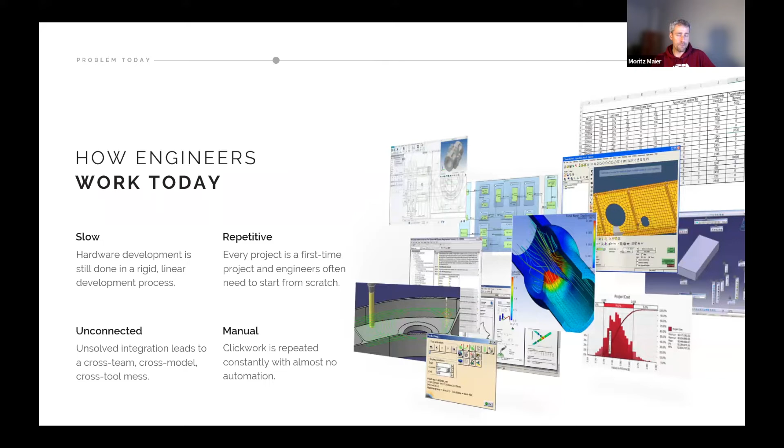The interesting thing is that once a project is finished and there's maybe a change in the design, or you need to develop another part which hasn't been developed before, engineers typically start from scratch. So they go back in the CAD world, do a whole redesign, then do back the meshing because the mesh properties are lost and stuff. So it goes on and on and on. And this is a huge problem at the moment in the engineering world in general.

So we see that we have this status quo of doing engineering, but we also see that we need to be faster in time to market. As you see, for example, with our climate crisis which is coming up, people need to reinvent sustainable cars or electromobility, and they need to do this fast. So the time of actually being able to explore different variations to see which is the best solution, and to drive this development process really fast to a final product, this is crucial.

And at the same time, we have this huge problem, or at least the demand, that we need to increase the complexity as well. So we need to think about recycling, we need to think about CO2 footprint, we need to think about multi-material designs, all the complexity that comes into those systems, at the same time being fast in development. Those two drivers really crash if we're using these old processes, methods, and tools of development.

And there are also some side effects that our customers are telling us, which are, I guess, good for you as young engineers, but also for the companies it's really a challenge at the moment: those very experienced engineers, if they get retired, basically the knowledge is lost with them. So the experts, if they leave the company, they're just taking the knowledge with them, and it's not available for the company anymore.

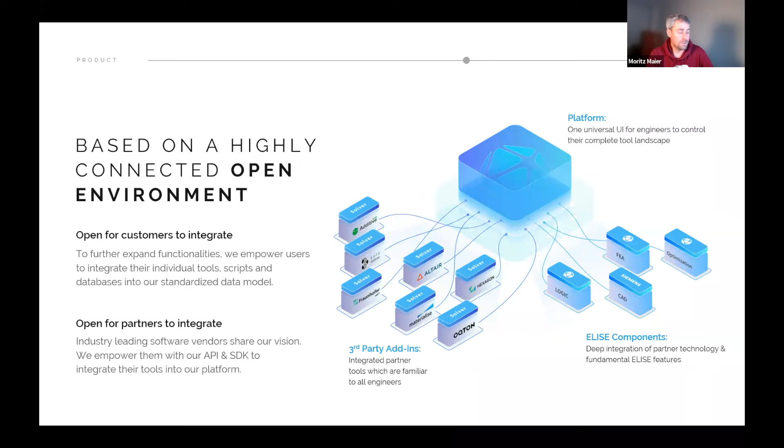So for example, from Altair's Hypermesh solution, or from Hexagon's generative design solutions. This setup is really smart, as you are able to connect basically everything you want. And if you are ready to program, you can also integrate your Python code and stuff. So it gives a nice development framework to play around with, and also the ecosystem we're providing - you'll have the chance to test it out later. It already connects a couple of different software vendor tools, and you're free to select and plug them into your workflow like you want.

So this was like a first stretch, some theoretical background information. Are there questions already here that I could answer before we jump into the software itself?

I guess not, Moritz. No questions. Okay, we're all a little bit shy. We're engineers, Moritz. You can also write the questions in the chat if you do not want to raise your voice.

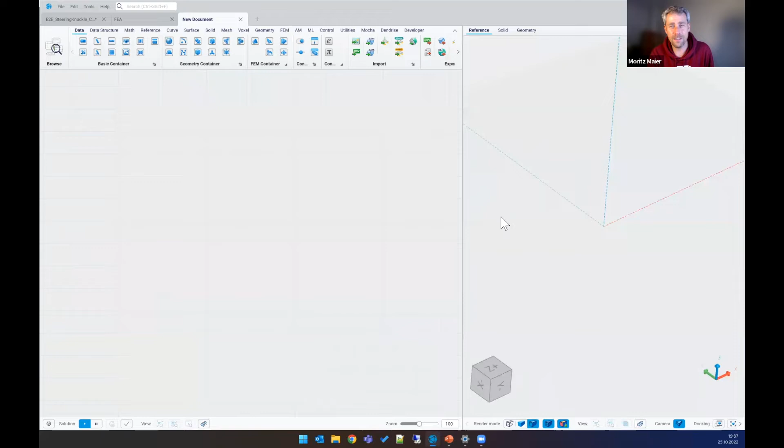But then let's just have a look into the software. I guess then maybe the one or the other question might arise. So as you can see - can you see the software, the two gray screens? Yeah, works, perfect. So this is the software, this is ELISE. And I want to give you a short introduction to it and guide you through, show you one or two examples before I then go back into the PowerPoint world to show you what our customers did with it.

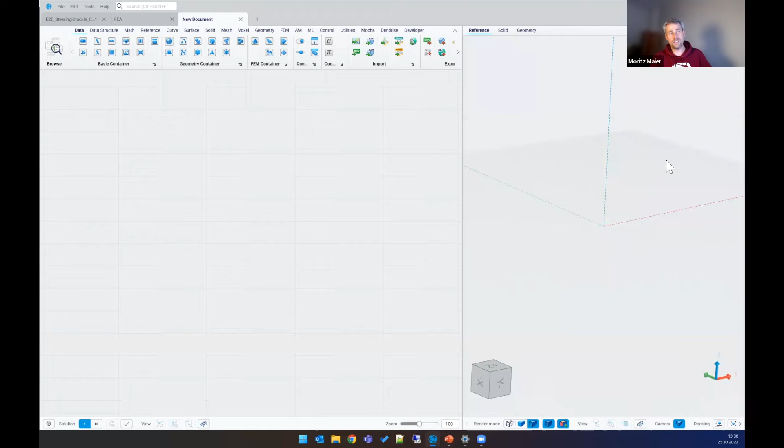But you can see that it's basically divided into these two areas. We have on the right side our CAD environment, where we will see the geometry in a second. So this is something like you can think about having an output, for example, for a CAD model for the algorithms, and also the interaction with the geometry world. And on the left side, we call it our virtual canvas, where we are able to do visual programming. And I want to start with a very simple example, just by taking two variables, maybe a 6 and a 7 in here.

And I would like to connect those two to a node which does multiplication for us. And if I give you the answer to all of the questions, 42 here, it's just the multiplication of those two numbers. So this is the basic principle of how the software works. Information is always flying from left over those wires to the right, and we have those components which are doing something - in this case, a very simple mathematical multiplication.

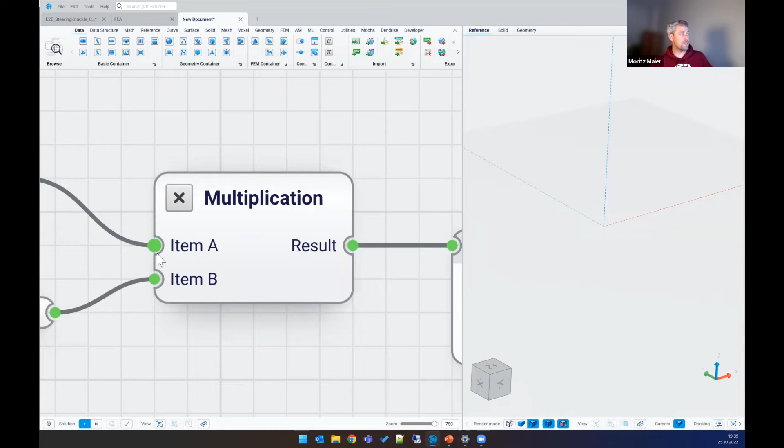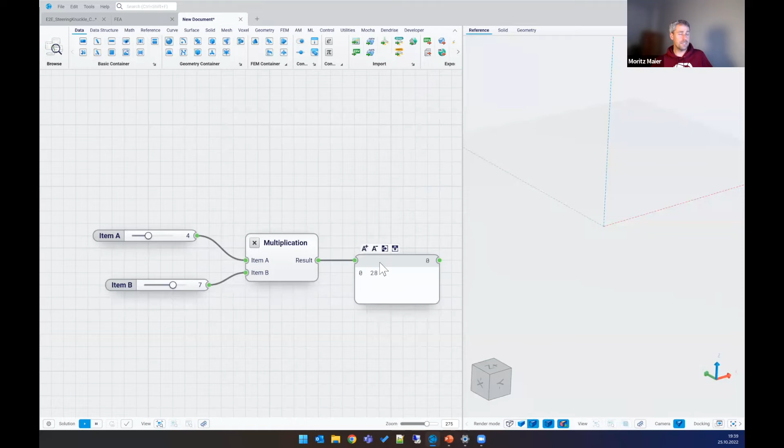We have inputs on the left and outputs on the right, and over those wires or cables, there could be any information flying. In this case, it's super simple - it's an integer value, a number, 6 and 7. And now if I change the parameters, maybe to 4, you can see that also the downstream results are updated instantly. So in this case, it's 4 times 7 is 28. Or if I change this in the background, it's 24, 4 times 6. I guess you get the idea of how the system works.

And the interesting thing is that we can now use this principle of visual programming for lots of different tasks. So this was maybe a hop into the world of, let's say, math. You can see that we have lots of logic operators in here - for example, if this is larger than that, or gates, or modulus, or divisions, or here's our multiplication component. But we also can do all the MATLAB style field-driven designs, tensors - everything that you would need to come up with logic or mathematical expressions could be programmed in here.

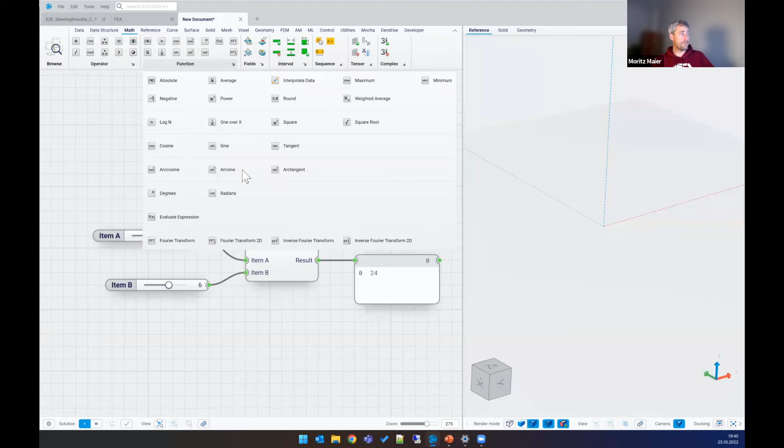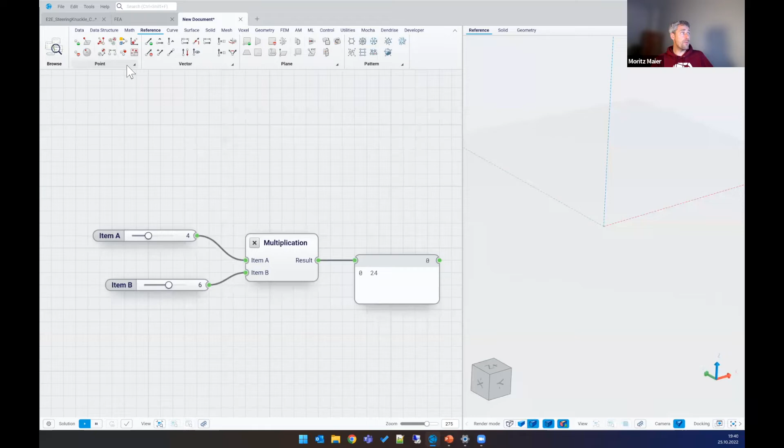But also we can do, let's say, more geometric stuff - so for example, creating points or curves or lines. So now we are more in the area of geometry generation or CAD modeling. And this is where things get really interesting.

Oh, my internet connection is unstable. Can you still see me or hear me? We can see you, but I think voice is a bit broken. Also hear me? Yeah, right now it works. Okay, then let's hope that the internet connection stays like it is.

Moritz, we have maybe one incoming question that you could answer. How is ELISE different from cloud-based software like Fusion 360, where the designs are shared with team members in real time with version and revision numbers automatically?

Yeah, good question. So Fusion 360 is still, I would say, a classical CAD software tool. You still create geometries by hand with sketches, and then it's there. And if you want to connect it to, let's say, another software tool, you need to write scripts or integrate it into optimizing tools.

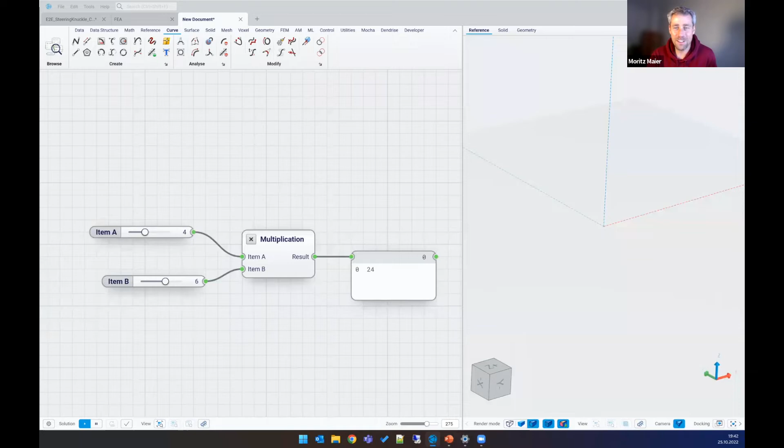So the software we're having here is not cloud-based, it's more like a Windows application. But you can connect, for example, Fusion to have your CAD model done. I guess we will show this in a second. If we also go to my next example where we connect the CAD processes to the FE world, I hope it should get clear that we have more of a process software here in ELISE, not a design software. But maybe you can re-raise the question after the live demo, let's see if I could answer it.

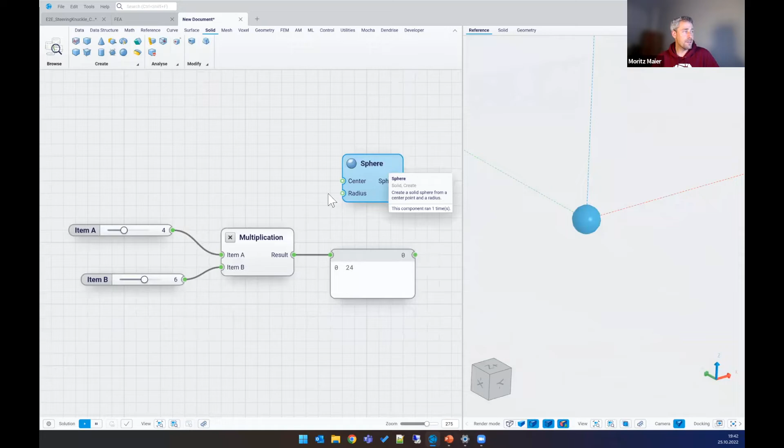So what I want to do next is hop into the geometry world and create, let's say, a sphere. Now you can see on the right side the geometry appearing. If I click on the sphere, I can see the building block that generated it. And if I now connect, for example, the result to the radius, I'll have a more parametric geometry. So I have the possibility to manipulate my geometry.

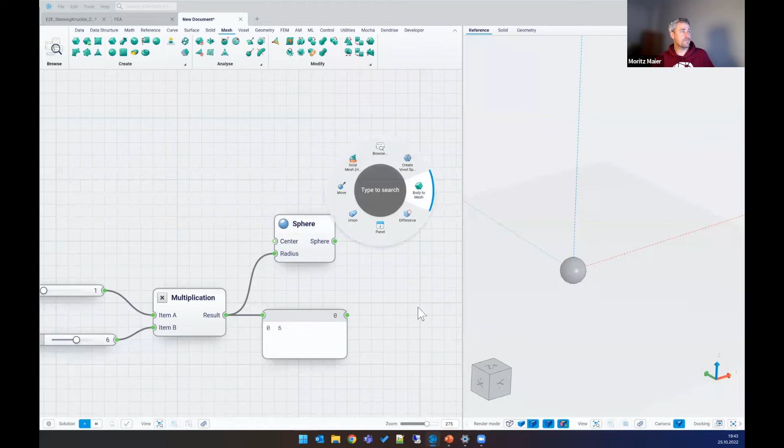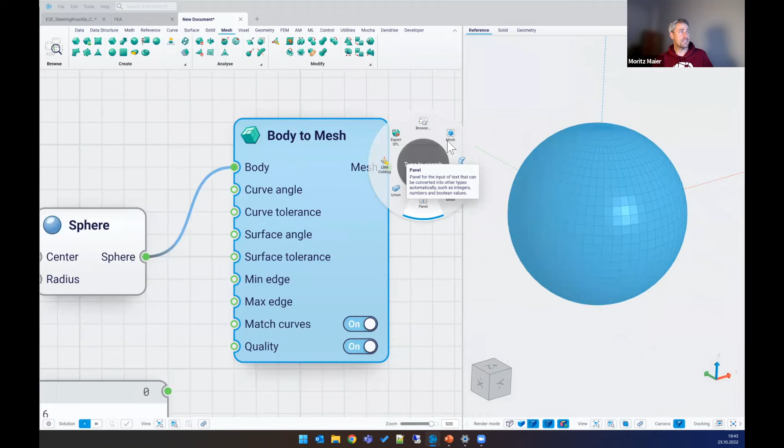I can do this with all the surface designs in the geometry world, but I can also go a bit further, let's say to the meshing world, and create a geometry mesh here. Now you can see the geometry type switched from NURBS modeling to a mesh design. This component is basically doing a body input where a geometry runs over the wire, and the output here, you can see, is a mesh container. So we have roughly 2,000 vertices and faces in here. We can manipulate data among different geometries or meshes.

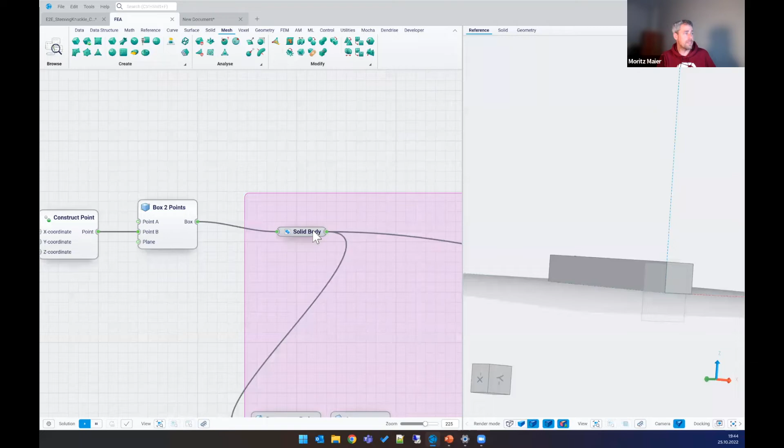The next step, if we go a bit further down into the engineering rabbit hole, would be something like simulation. I've prepared a little example for you, which is basically a very simple bending beam, which you can see on the right side, like a box. Let's just follow these wires and see what happens. First, the geometry gets inputted into a component, which is a solid mesh component. If I turn it on, you can see that we're able to mesh the geometry.

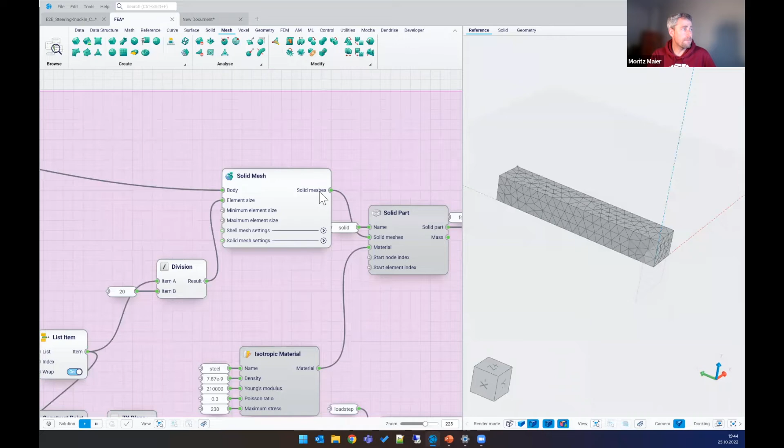Now we are defining the boundary conditions for a finite element simulation. So the mesh inputs into a part, we have the material definition, the support and forces here, and a static linear load case connected to a complete model. If I have a look into the model, you can see we can do classical FE pre- and post-processing in the software.

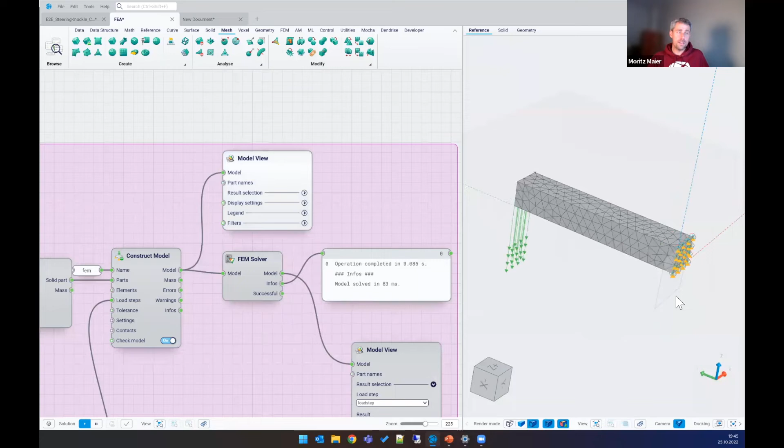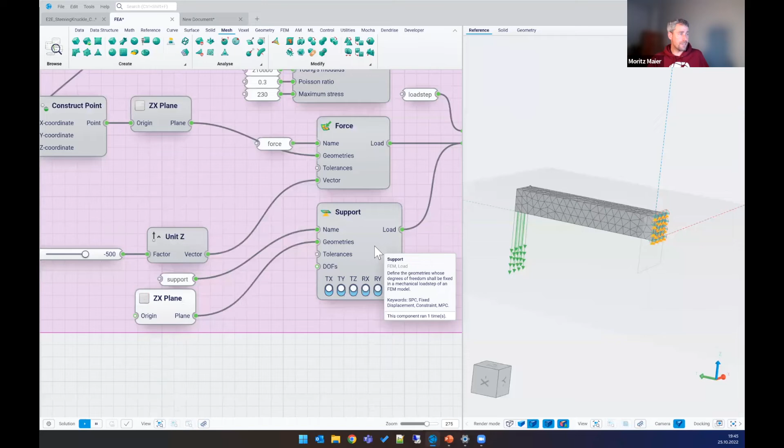On the right part, we have those nodes that are constrained in all the degrees of freedom, and we can see the forces tearing down on the side of the bending beam. Now I want to look into the support definition, because things get interesting here. The support is defined by a rule, and this rule is that the support should be applied to all geometries in this plane. If I turn on the plane, you can see all the nodes inside of it get this constraint.

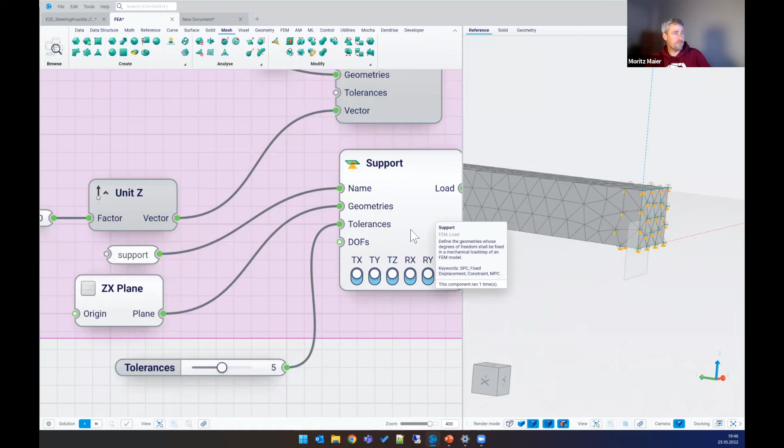But now what happens if I enter a tolerance of, say, 5, and plug it in here? Now you can see instantly these boundary conditions got applied to an even larger area. This is something really new to engineers, that we can apply the finite element boundary conditions rule-based - not based on geometries, not based on the mesh, but on rules. And now this enables us to do something really interesting.

So let's run the finite element solver here. You can see the result of this bending beam, the stresses. We can also switch to the displacement, and you can see the colors here of the beam.

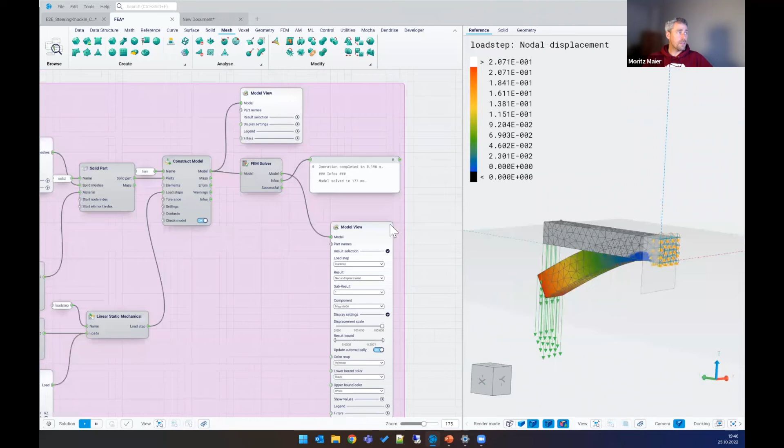So far, I would say this is also possible to set up in, let's say, Fusion for the CAD part, and then connect SimScale or another cloud simulation tool to run these simulations. But what we have built here is not a model for this one bending beam - in this area, the whole process world here, we have created a set of rules for how to simulate any kind of bending beam.

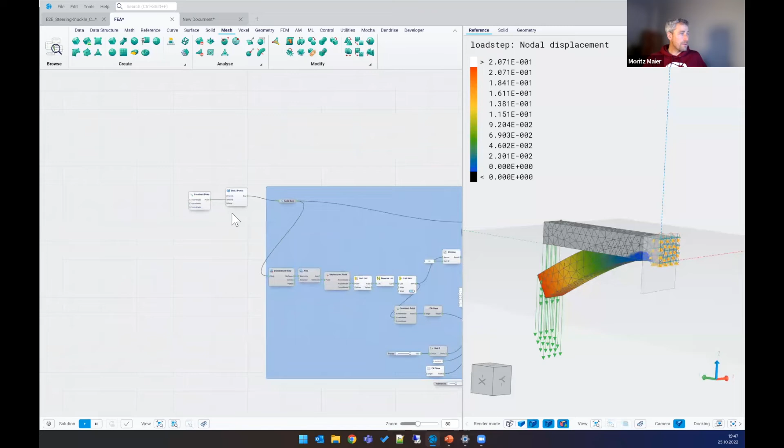So you can see, for example, if I go back to the geometry and grab this wire or point here, which defines the bending beam length, and make it a little bit longer - I'm taking this node and dragging it. Whoop, and it's resimulating. The whole process gets automatically redone.

And the interesting thing is that we've created a workflow on how to simulate those bending beams. This is the difference - sometimes we're not looking at a single bending beam or process, we're looking more at a set of rules on how to create these bending beams.

This was a very simple example, but I want to hop to a more real case which we're able to show. It's from one of our customers in the Japanese automotive industry, about something we call a steering knuckle - a part of the car which connects your wheel and the chassis, with the braking caliper and everything in there.

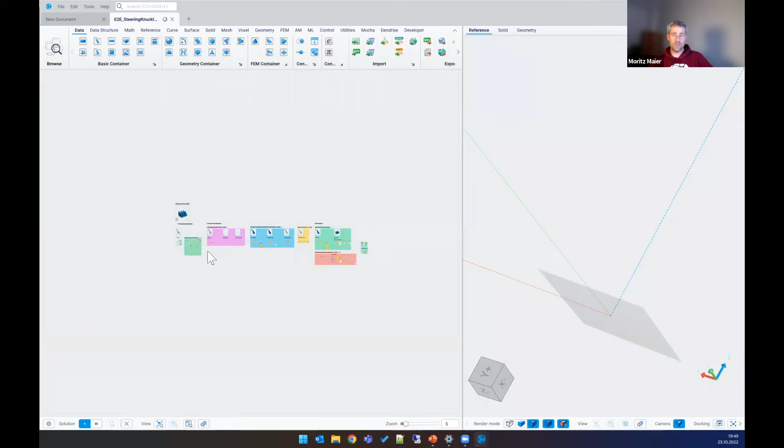This will need a couple of seconds to load the whole process, but I guess you get a real insight into an example of how this looks in the real world. What you can see here on the left side is basically an end-to-end development process for an automotive part, and all the different colors represent different departments.

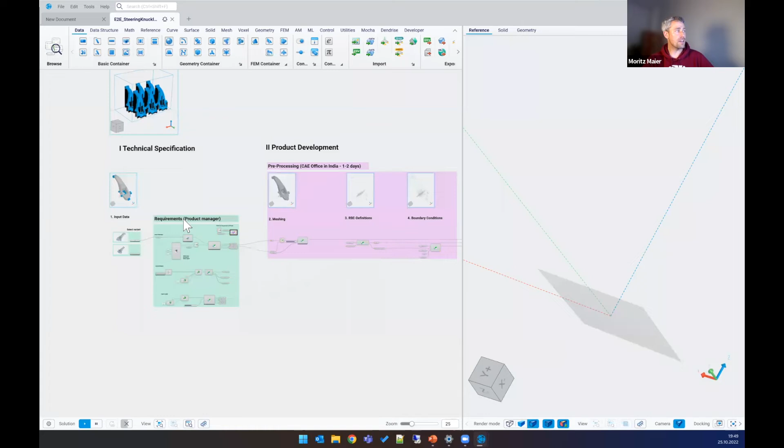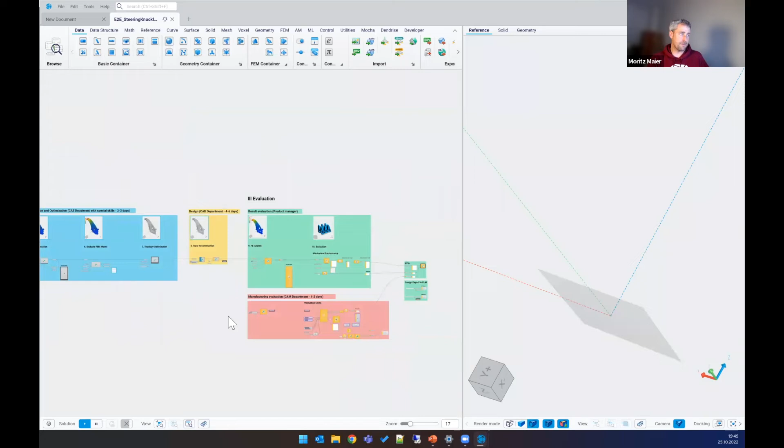So at a very high level, at the beginning of a design project there might be managers defining requirements - how big, how fast the car or steering knuckle has to be. Then there's an FE department, a simulation department, a design department, some managers or manufacturing guys, and at the end you export your final data to the printer or manufacturing machine. Each of these departments usually uses a different set of software tools.

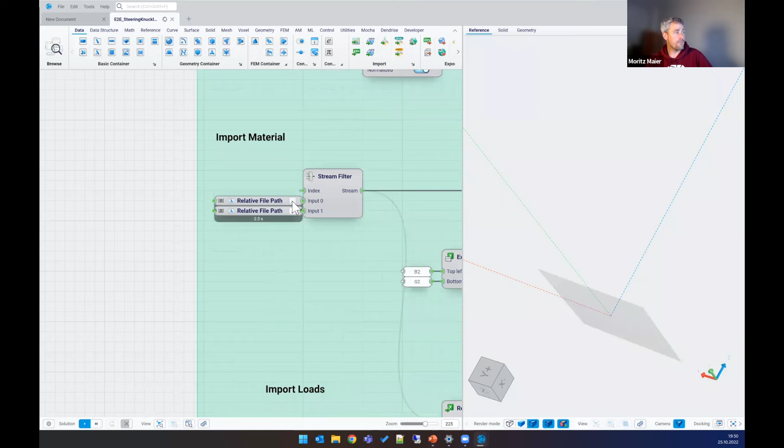Let's have a look. Maybe the product manager at the very beginning gets the geometry from a design space, gets the design space from his managers where the project could take place, gets the interfaces of the car from packaging designers, and also gets all the possible materials - you can see this is from an Excel list.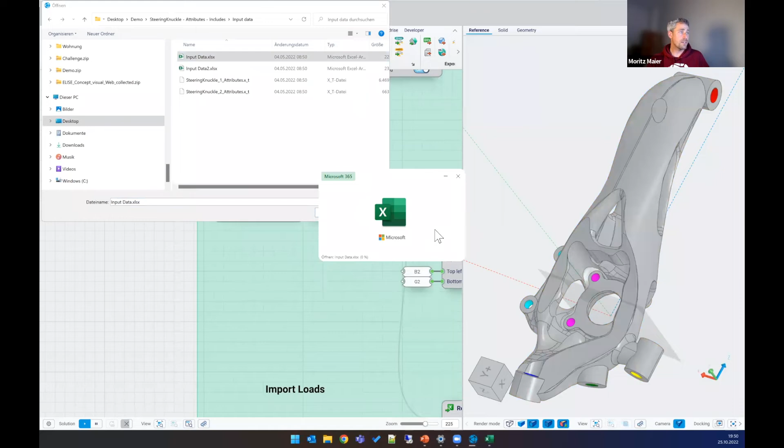Let's open such an Excel list to see what's in there. Yes, so it's basically the whole material database of this client, with material properties, strengths, densities, and all the stuff an engineer needs.

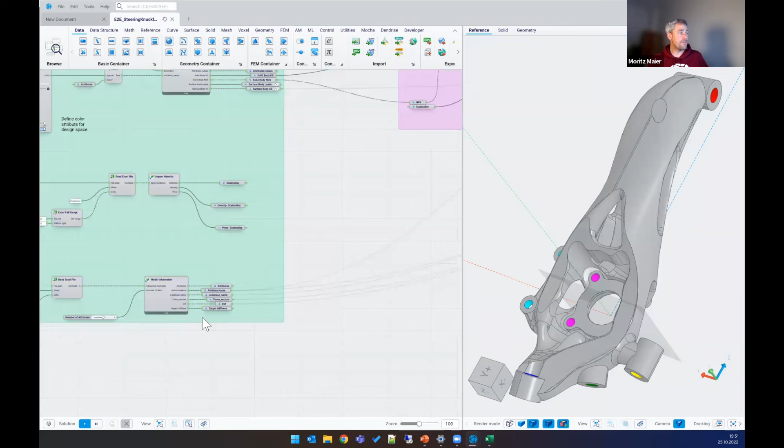Let's see why my Excel is not running - maybe it needs a couple of seconds. It also has the loads in here, so we see the whole target stiffnesses of the part, and all the requirements for developing this product. This information, as you can see, flows everywhere in the process - the whole design team needs it, and it flows from department to department.

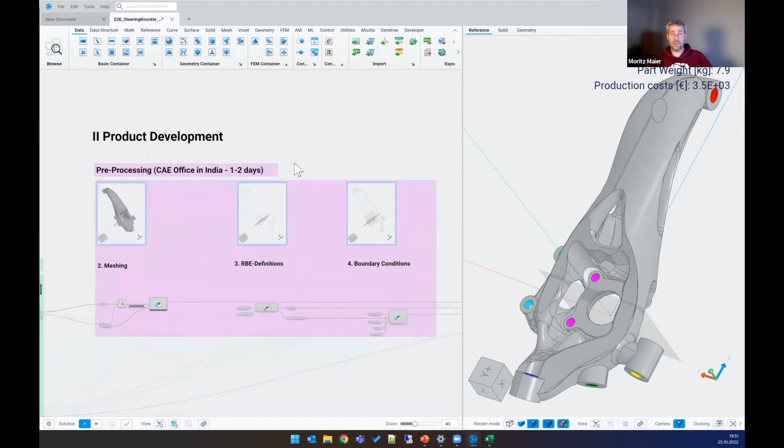We also have the first department here, the FE department creating simulations. If we go further, we have the simulation department doing the stress design, and for me it's always very interesting to see this specific step where we need a topology optimization in the process.

Maybe you've heard of this design principle - it's the idea of finding the optimal load path and design inside a design space. You can see that the neutral axis of this part is more or less deleted, and you can see where the material distribution should be placed from a mathematical optimum.

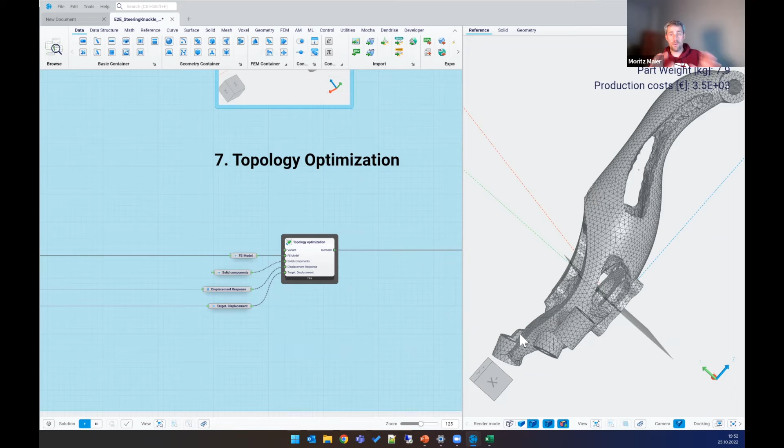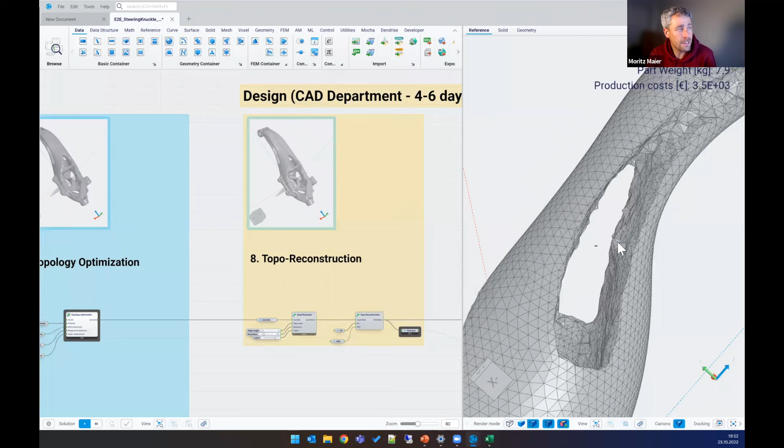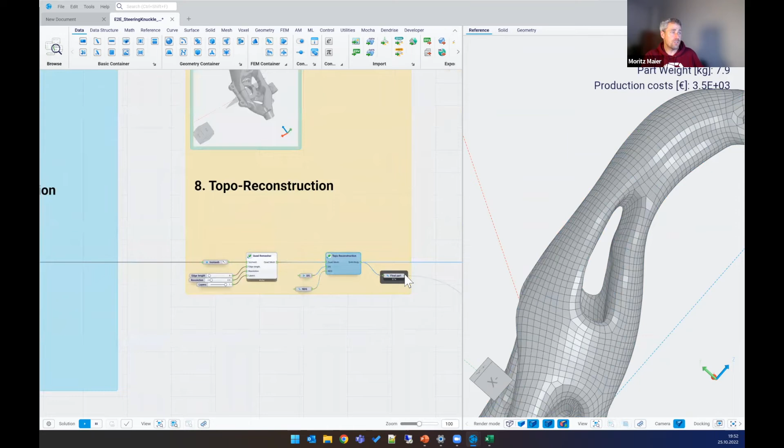With this information, there are usually guys, maybe in Fusion, trying to redesign this process. The problem is usually something like this - you get little fragments, this tessellated design, and you need to interpret this. With a process view like this, we can have an algorithm that does a bit of cleaning to come up with a quad mesh instead of a tria mesh, then moving into a technology we call topology reconstruction.

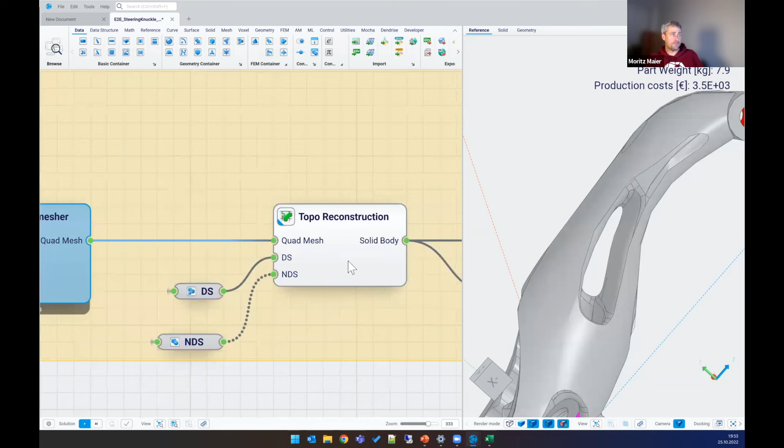It's the idea of having a subdivision technology to create a NURBS geometry out of it. All of these steps look very simple here, like one component. But maybe you've realized that I can also look under the hood of this workflow, and if I click on it, I get the sub-workflow.

This is really interesting. It's going a little bit into the details of the software, but it is the basic principle of having functions in software code. Imagine bringing my example from the very beginning, that you want to come up with a website and maybe you need a login function. But a login function is something which is really standardized, so you can use a login function for any website.

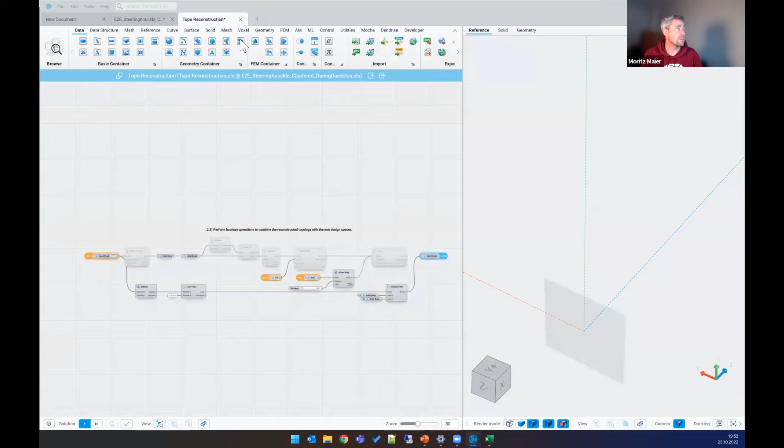The same goes with our function approach here. In this function, somebody has coded the rule set on how to come from a mesh back to a geometry world. This function could be used not only in a single project, but basically on every project, just by copying and pasting this workflow into the next project. And this thing goes on.

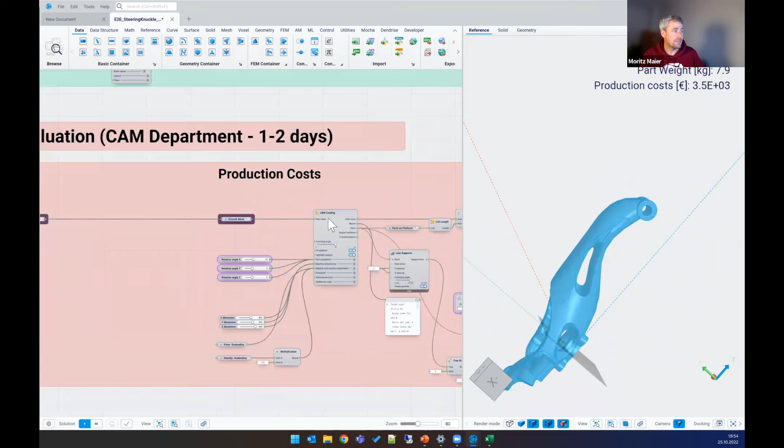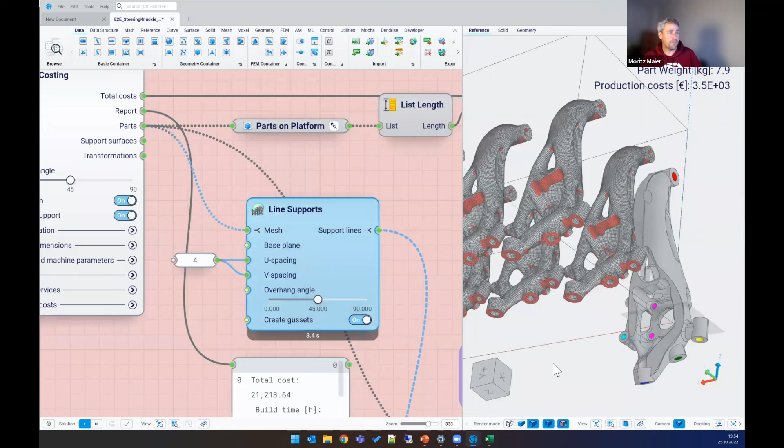So here, for example, we go to the production area, so it's like a 3D printed part. There is a component which calculates the whole print job. You can see that if I want to print this thing in my build shop, I can put 4 of these parts. You can also see that the red areas need some support for the printing process, so you can see the support structure in here.

You get a cost report, for example. In this case it's 21,000 euros for the whole build shop, and it's 3,500 euros also shown in the dashboard for the manufacturing cost of one of these pieces. This is basically the idea of the process - you get full access to everything you would like to know about this part.

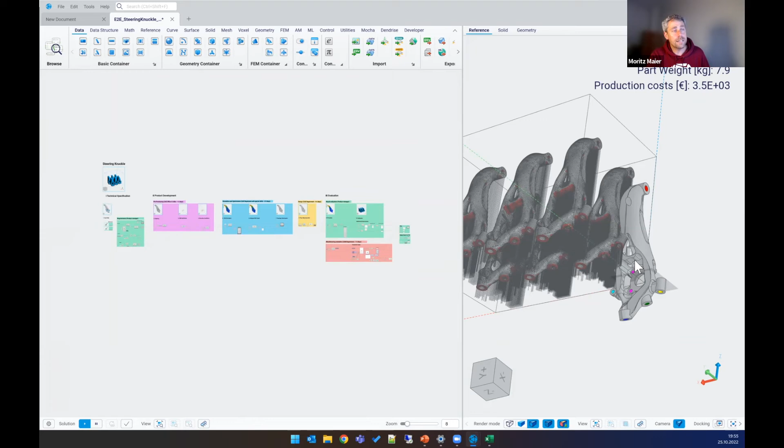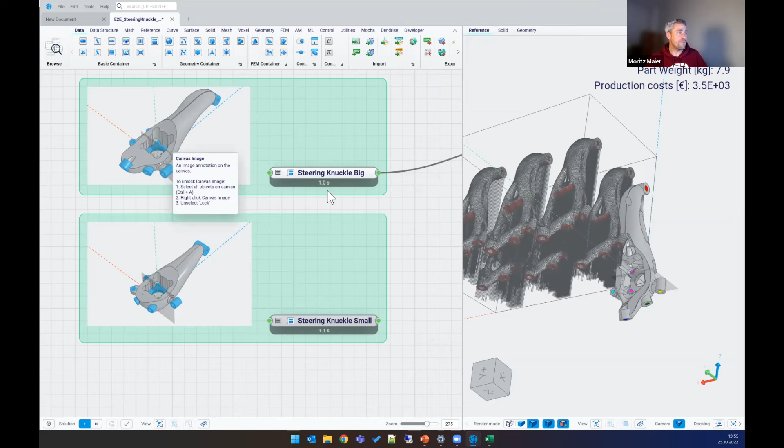Again, our customer here has designed this workflow, so it's not about actually having this single steering knuckle design. So if I now go back, same thing as if I change the length of my bending beam - if I reconnect, let's say, the big design space, which might be from a Volkswagen Passat, the big car, and we want to change it to a Volkswagen Golf, I can just unplug it and re-plug it into the smaller piece. And now the process is rerunning.

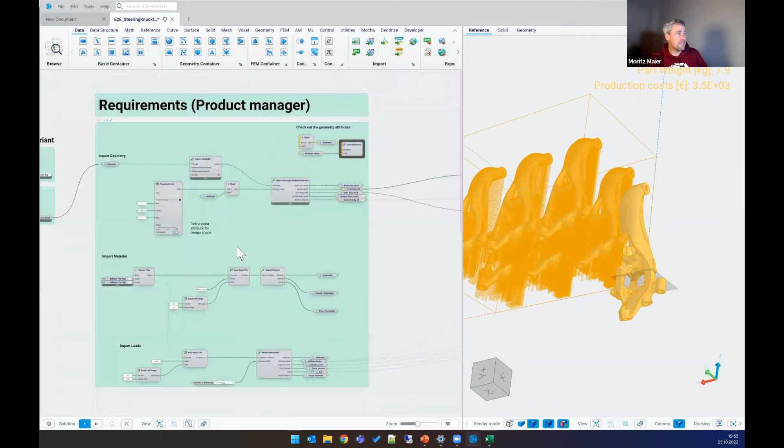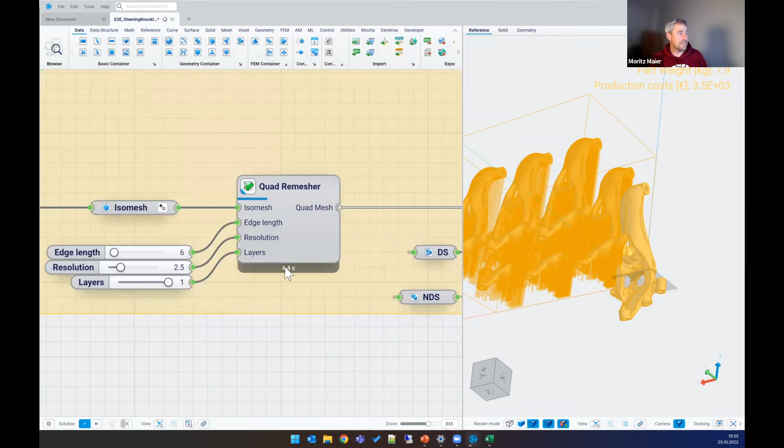Let's see where we are. You can see that the yellow components are somehow outdated, so they need some information. At the moment the process is running here, and now the topology optimization is running, then the CAD design is running. I can loop in, you can also see the time it needs for calculating the stuff. If we wait a couple of seconds, we should see the new design of the new smaller car, and we should also see the new costs and the new part weight.

I guess this is something which is really at the core of our software - that we are not developing a single part, but we are more or less designing a set of rules and processes and steps for how to design a part. Usually the setup process of such a thing takes a little bit longer than doing it manually in classical CAD tools. But once the process is there, and once you have to redo the thing, or optimize it, or run iterations, you really can save 90%, 96%, 99% of time.

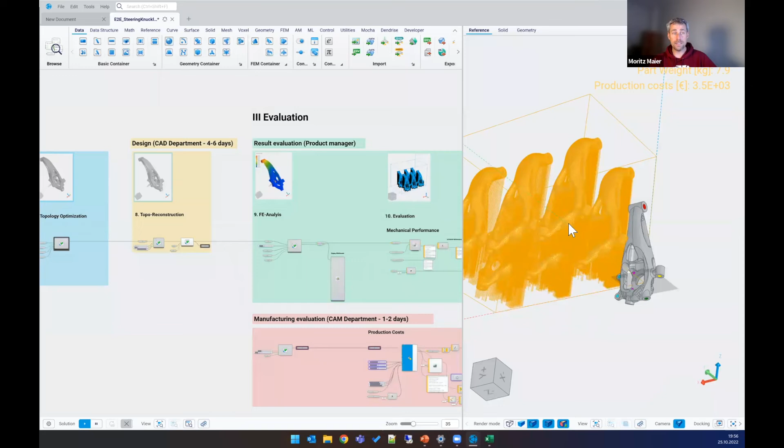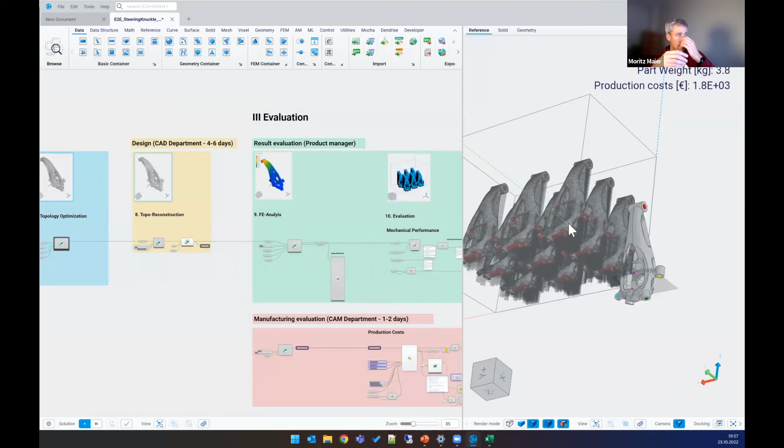This is also the basic idea of how we save 10x, or how we accelerate product development by 10x, because we are just digitalizing all the tasks that you need to do in order to come up with a part like this, and afterwards could automatically run it. It's just an amount of computational power that you need in order to define or speed up your process. But all the knowledge of the engineers, every decision, every line and every process, is coded in this visual programming language.

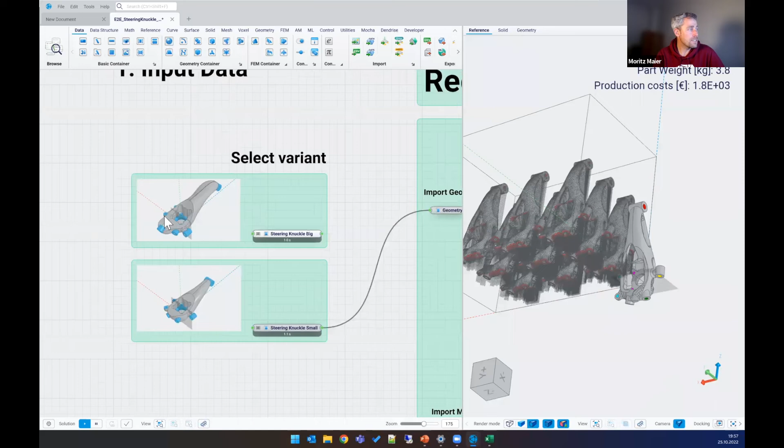I hope this also answers your question, Murad, about the difference between Fusion and ELISE. We are more like this process digitalization engine, and maybe Fusion could be used to generate the initial design here. We also have possibilities to import from CATIA or Siemens NX or other Parasolid kernels, and I guess Fusion is also based on the Parasolid CAD kernel. So we could possibly import the geometry if you want, and then further process it down the road, for example to connect it with other tools that you might need for a product development process.

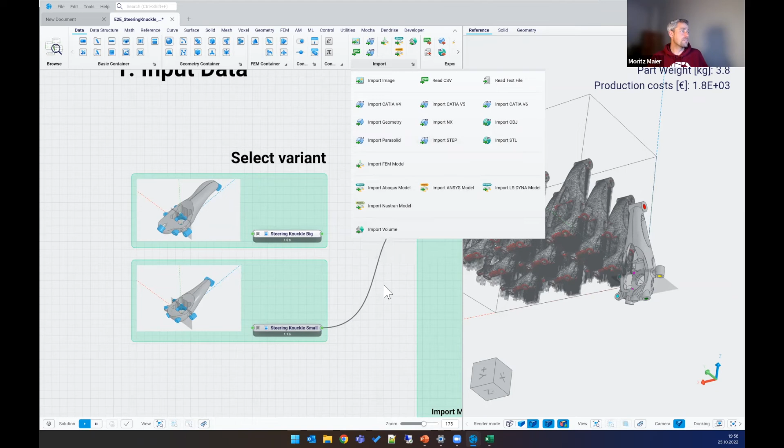So far with the live demo, I hope you get a little bit of an idea what we're doing and what you might be doing tomorrow. I know there was a lot of detail here. Marvin and the team will guide you through the very basic principles tomorrow.

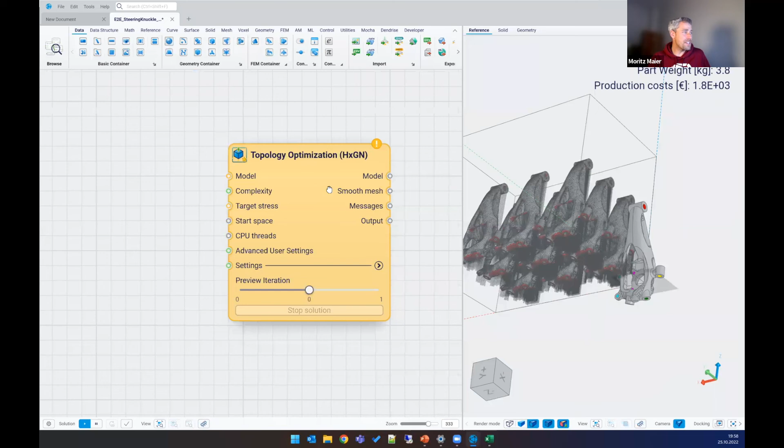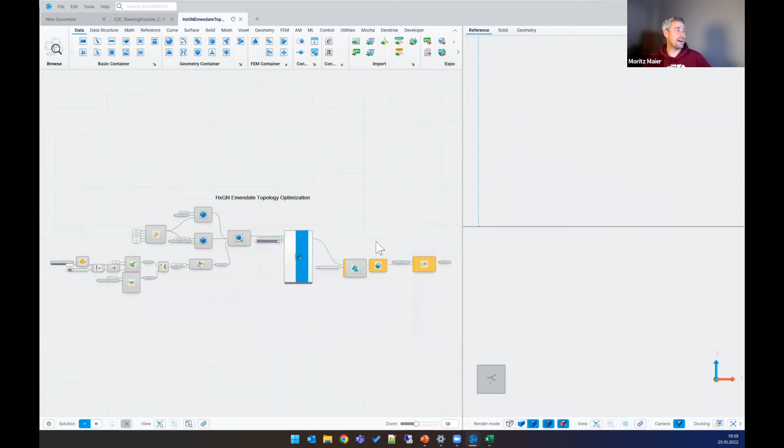But I think you could get a nice understanding. I want to show you my favorite component here. It's a component from Hexagon called Emendate. Not sure if you might use it later, but it's a topology optimization component. The great thing about the software is we have nice example files coming with every component that give you a minimal, basic idea of how the function works. You can see here it's already running some topology optimization - a very simple bending beam. Now you can see live how this component is trying to optimize the structure to find a real lightweight design. I guess this is something which makes it fun to work with, and you might have the chance to use it in the tutorials tomorrow.

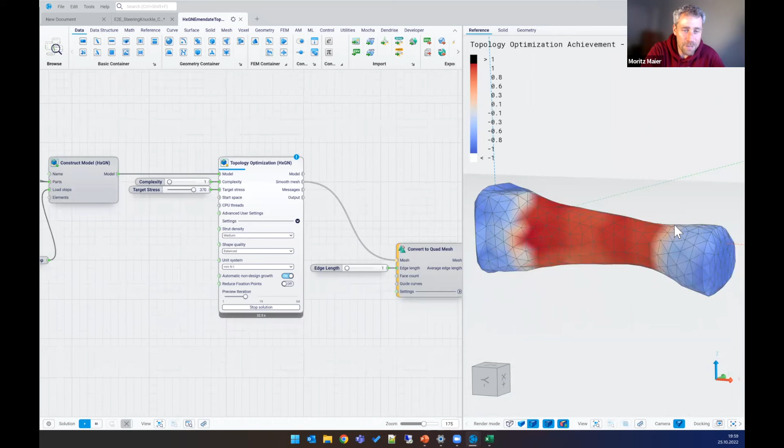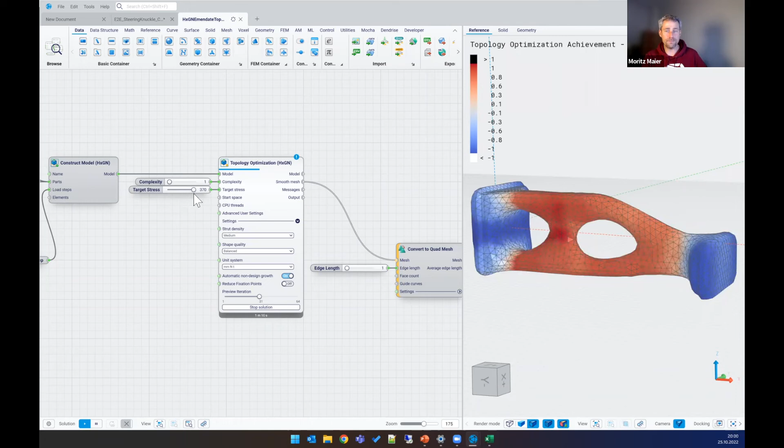There's another question coming in - if you're replacing Teamcenter. Most likely not. Teamcenter is more a database where geometry is stored, versioned and updated. We will come up with a connection to Teamcenter, also to Windchill and Aras, and other things, maybe also to GitLab, where you can do the versioning in the external software. So I think we are complementary to those systems, as those systems are really big databases, and we are more focused on workflow automation. I'll stop the solution here. Are there other questions about the software?

Actually, that's a good one. ELISE has been a Grasshopper plugin in the past, so we have our roots in being a Grasshopper user - we love Grasshopper and the community. We asked McNeel if they wanted to work with us together and create a Grasshopper for engineers, because the Rhino CAD kernel wasn't really feasible for engineers, as there is no solid modeling in there. McNeel was very happy being in the architectural world, so we decided to basically create nothing else than the Grasshopper for engineers. So if you have experience in Grasshopper and you're an engineer, I guess you will love ELISE. We tried to copy the best things that we love from Grasshopper and improve the things that annoyed us - multi-threading, parallelization, these kinds of stuff. So yeah, it's basically the same.

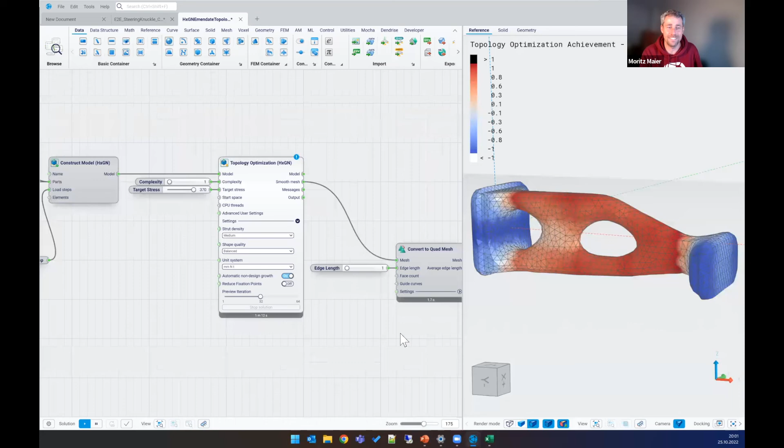Really cool demo, Moritz, by the way - really nice. I think the best way to actually learn ELISE is to really use it live. So tomorrow there will be a live demo session - Marvin showing you ELISE, working through a use case, and then you'll also get homework in ELISE. That will be fun. So, any more questions, guys?

Okay, let me show you a little bit of one or two use cases that our customers have done, which will give you an idea how you can use the software. This is an example from Airbus - they've done a kinematic part of an A320. We try to compare the old world with the new world. What you can see here is that Airbus, at the moment, is using 9 different software tools and certain iteration loops. Among the software tools, it's usually CATIA as a CAD tool, Nastran for the simulation world, Excel, and also the HyperWorks suite and OptiStruct for the solver technology.

As you can see, they're doing classical engineering iterations, 30 in a row, in order to optimize the part. If you compare the solution where they developed the same part with ELISE, you can see that they were able to automate their iteration loops and save roughly 90% of the time. But also, which is interesting for me as an engineer, is that they were able to optimize the final outcome - the weight. We asked those engineers at Airbus why. I mean, of course we're optimizing stuff, but we're not really changing the tools. I would expect that the engineers at Airbus would also be able to reduce the weight, and we asked them, why did you end up with 200 grams at the end?

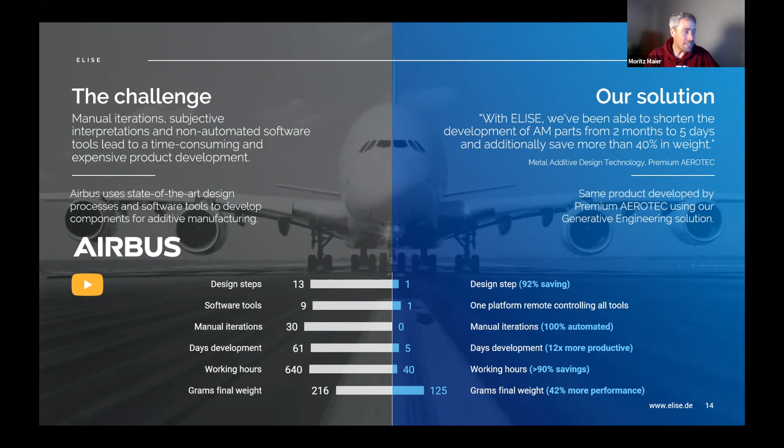They answered us, to be honest, we had a budget and a time, and after 640 hours of doing these iterations, we had to take the best result that was on the table. This is something I didn't expect them to answer. It shows that if we use algorithms or computational power to run maybe 10,000 design iterations overnight, it gives us the opportunity to be faster, but also to explore a wider design space and really choose the optimal design. This is something I really like about the solution - it gives us the flexibility to play around, explore things, and search for the optimal solution.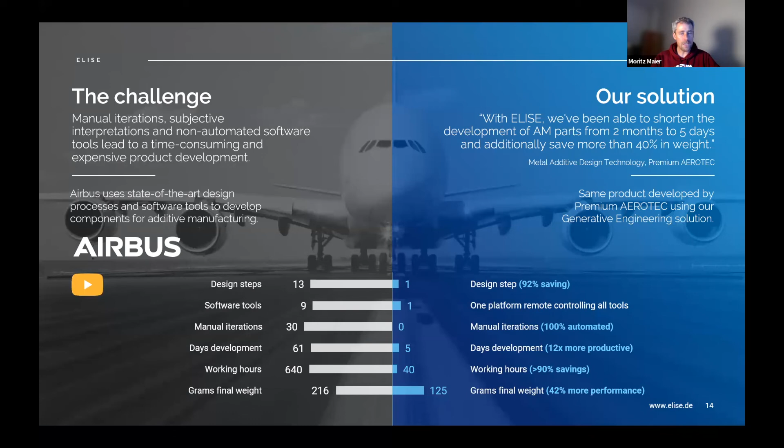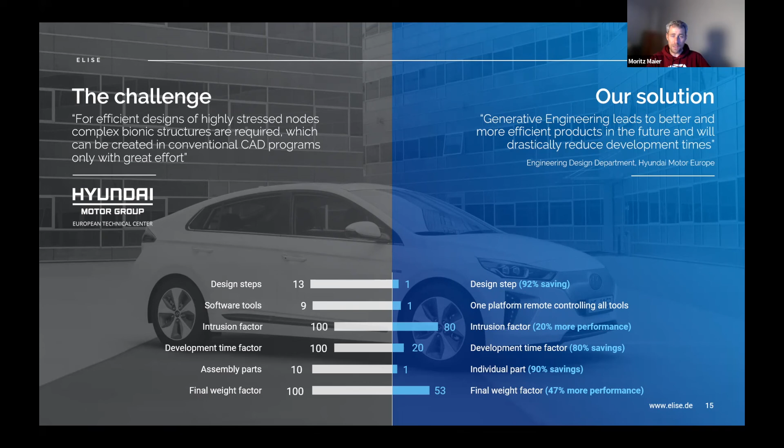I'm really looking forward to your feedback if you're using the software on your own and try to get these things going.

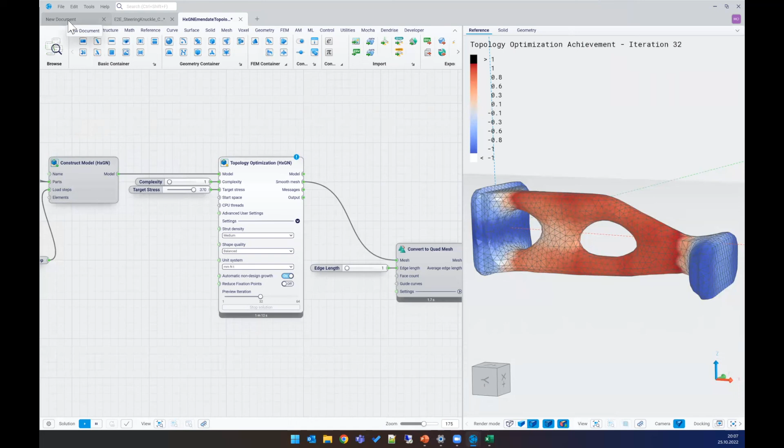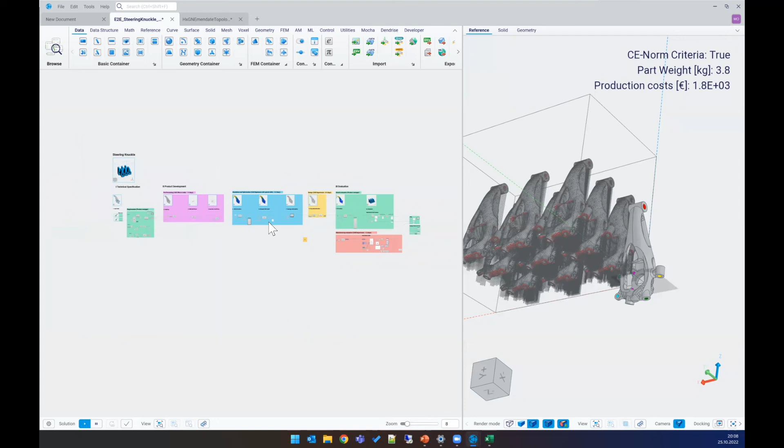Sorry, but I have a question please. Can you please return to the software, to the live demo, where you did your simulation? This one? No, I want to see the first example where you changed the geometry. Where it changed it now? You mean the simulation example or the knuckles? I don't know, where you changed the geometry from bigger one to smaller one. The steering knuckle? Yes, exactly, this process. I didn't understand what you did exactly - first you changed the geometry, because I don't know exactly what that steering knuckle is, I don't know a lot about cars. So you only changed the geometry and kept all the other blocks the same?

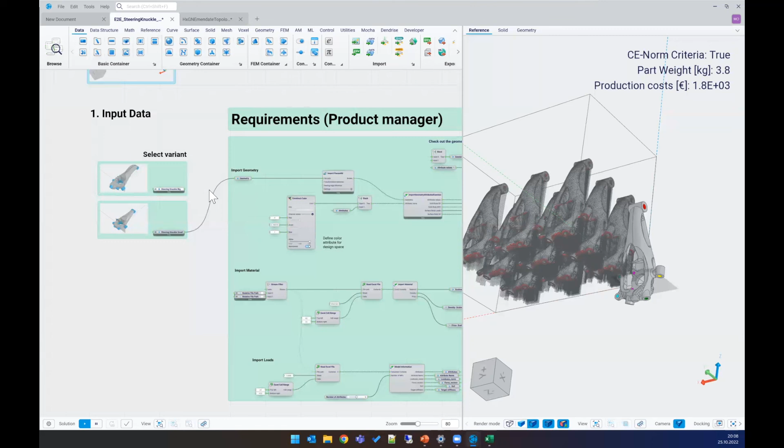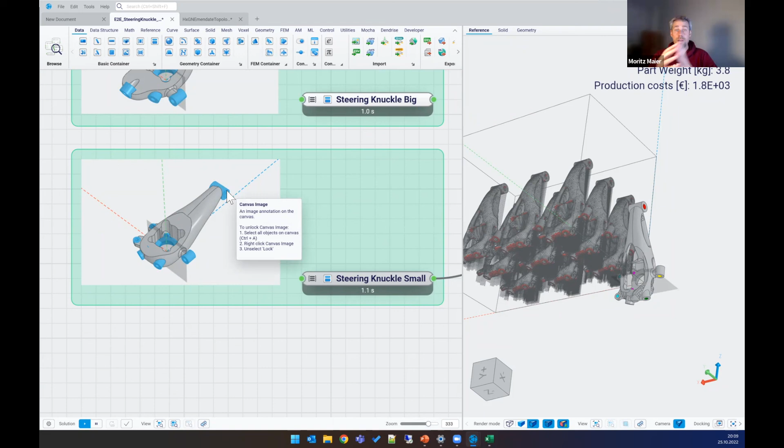Yeah, exactly - so no need to change anything in the boundary conditions, for example, or the values of some parameters in the other blocks. They're changed as well - here, for example, these are the different materials, and you can see there are two inputs. Here we have a stream filter, which is a logic that also switches the material. So for example, for the smaller steering knuckle, you might have other forces - it's a smaller car, you might have other forces reacting on the wheel, maybe it's a smaller wheel. So usually in the real world, it's not only changing boundary conditions - if you have derivatives, different variations of a part, the forces, materials, or manufacturing technique also change. But it really depends on what the project is about. The beauty of such a system is that you can really define your own logic - for example, if you can read from an Excel list here, or here, where are the material models.

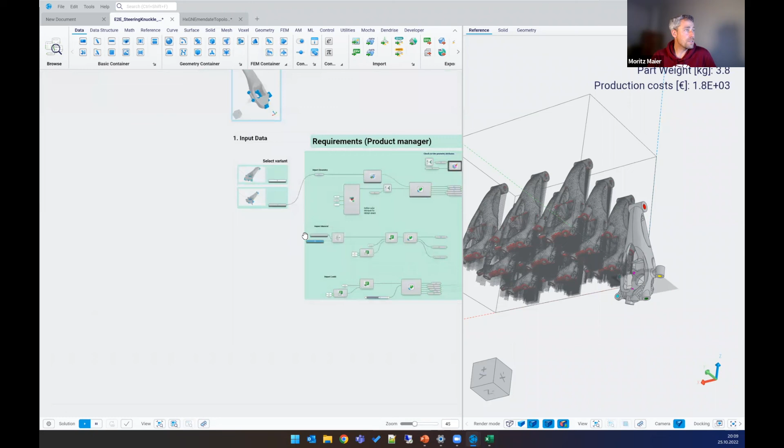You can do like math, multiplying things and saying if this, then that, or so. You can be really creative in setting up these logics. And usually this is what the product managers can do - the people who know basically what kind of materials or what kind of loads are required, they can set up the system.

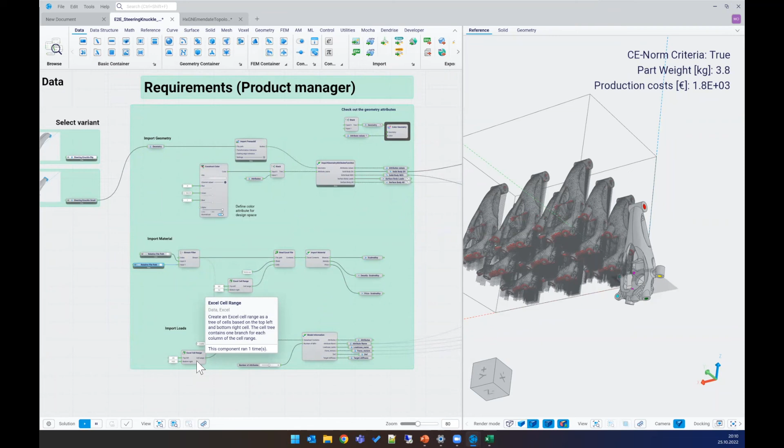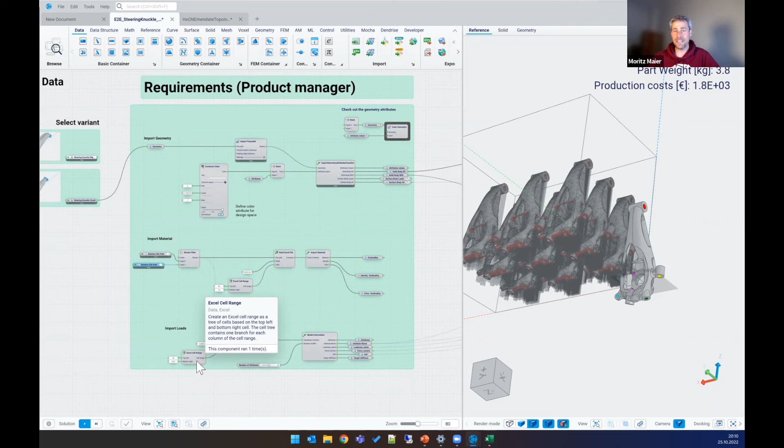So you need always to do some changes in the blocks, if it makes sense from a mechanical point. You don't need to, but for example, if you only want to change the geometry, you can rerun the process with the same parameters, only to change geometry. But the question is if this makes sense in the real world later. So if you would, for example, apply the big forces from an SUV to a small part of the car, which is made for maybe a small car, it might explode or something because it's just too much force.

I want to ask, can we use this software, for example, for CFD problems? We're working at the moment on these CFD connections, so it's not yet there. At the moment, if we go to the finite element models, we can do linear static, modal, nonlinear, and buckling. So I would say it's more for the mechanical simulations, for mechanical engineers - for cars or Airbus or aircraft.

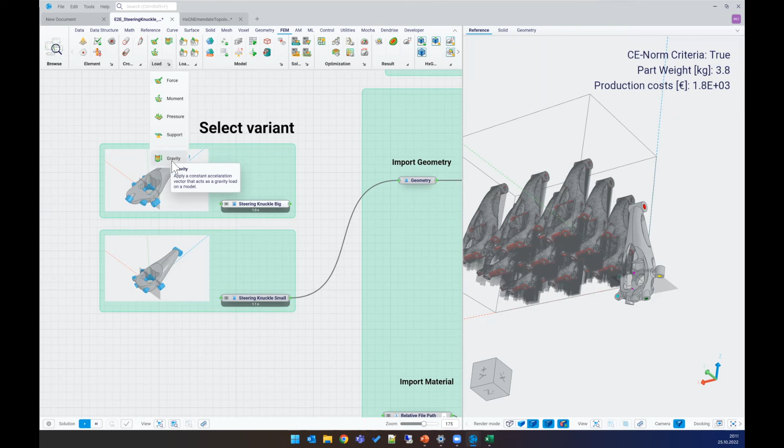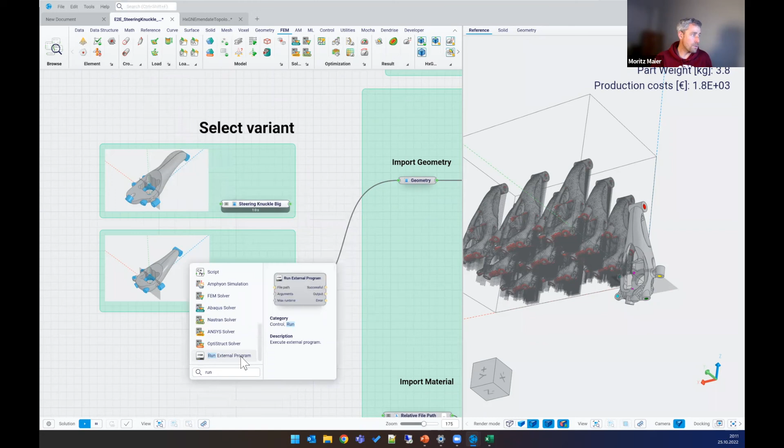But we also have some customers who are using the software to do the pre-processing for CFD simulations, for example the meshing and the geometry generation, and then scripting the CFD solvers. So if you are using maybe OpenFOAM or something like this, we have this nice component called Run External Program. In the release coming out next week, we'll also have web components, so if you have a cloud software tool like SimScale, you can connect the software to the API of this tool and use the CFD capabilities from the external software. That's on our roadmap, but at the moment it's focused on mechanical engineering.

Yeah, okay, I understand. Thank you. You're welcome.